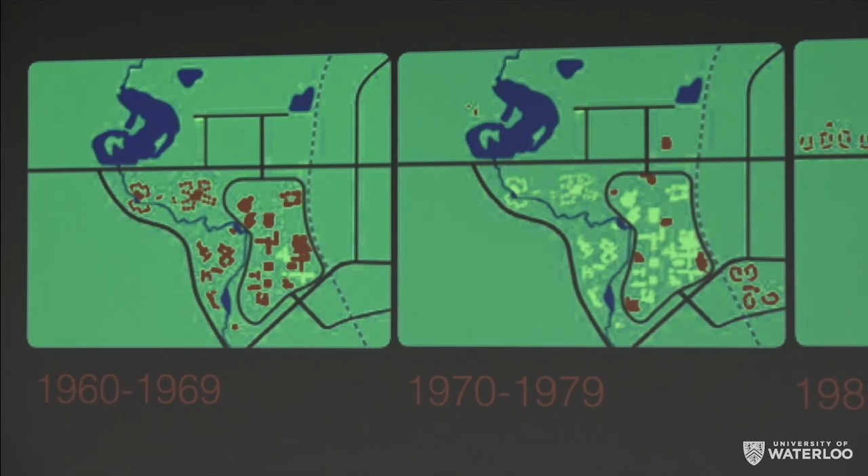80 to 89, what do you get? Fed Hall, Columbia Icefield. The building on the right wasn't built. That's the conversion of Waterloo manufacturing into dance and fine art, right, and such.

And then the two buildings that matter to me are the one at the lower left, which you may euphemistically know as ES2, and the one in the middle, huge red pattern and form in the middle, which is this building right here.

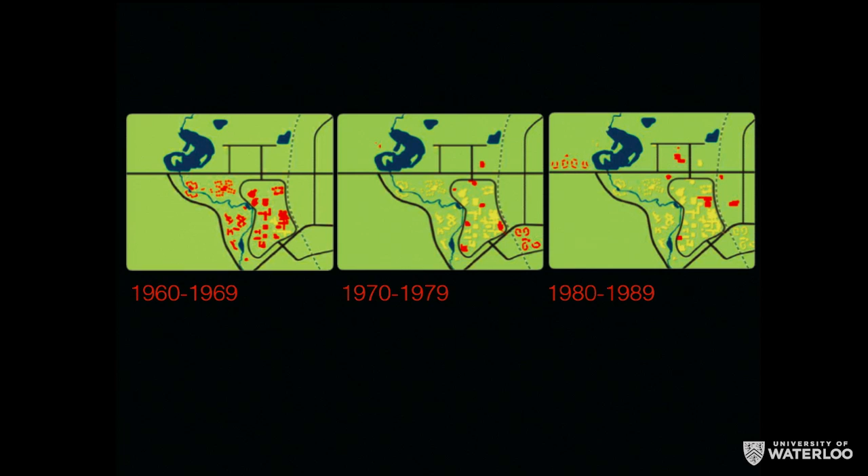It's really interesting how little was actually built in this period, and construction actually drops further, as if I gave you the map from the 90s, there's virtually nothing on it. And then around 14 years ago, things start to pick up again, ramp up in a big way.

But I just wanted to put the Davis Center in some kind of context here, because there's a huge slowdown in construction from the end of the 60s. It's slowing and slowing and slowing into the 80s and actually into the 90s. So this building is actually a sort of rare phenomenon.

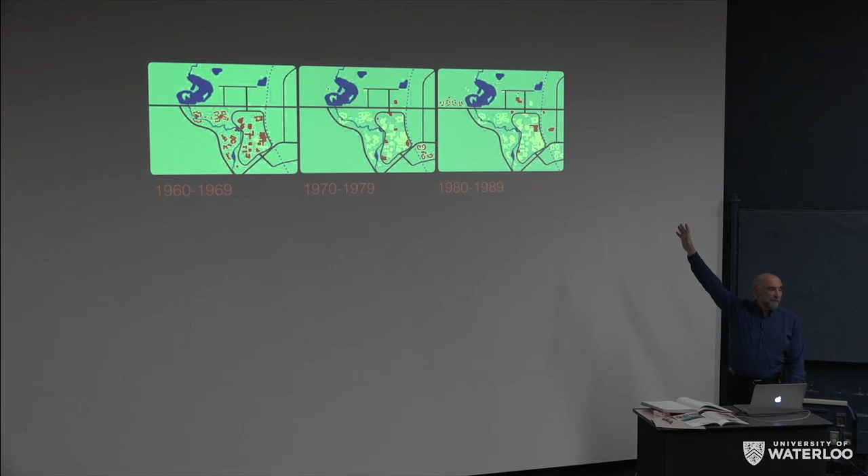For those of you who are around, the funding issues surrounding this building were quite profound. The building was supposed to cost $20 million. Actually, to think of getting this building for $20 million today is just inconceivable. We live in the shadow of the quantum nano cash cow.

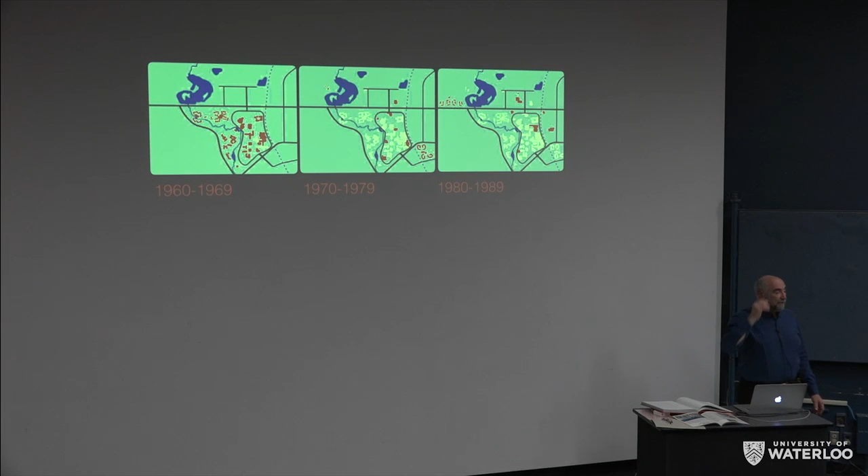But it didn't cost $20 million. The price ballooned, and of course, it meant that other construction projects had to be put on hold.

Now, I'm going to look at this from the architectural perspective, and I'll remind you that when Waterloo was first conceived, they actually hired a local firm named Jenkins and Wright to do the first building design. But quickly, and for reasons that I'm not clear on, they jettisoned Jenkins and Wright. Jenkins and Wright is best known for what was the C.N. Weber plant on Queen Street in Kitchener, a very beautiful modernist building.

And Waterloo went out and hired Shore and Moffat, a big old firm from Toronto, to do the master plan for the Waterloo campus and to design the buildings. To be dead honest, virtually everything you see in this aerial photograph from 1967 was designed by Shore and Moffat, with the exception of the under-construction Math and Computer Building, and of course the affiliated colleges on the other side of the river, which were all actually designed by local architects. But otherwise, it's all Shore and Moffat.

And when you talk to people who were working in the office at that time, they were having a riot. At first there were very linear, straightforward buildings creating these courtyards and such, but then they kind of get on the weed and design the engineering lecture hall and South Campus Hall, and you wonder what were they smoking. This is the 60s.

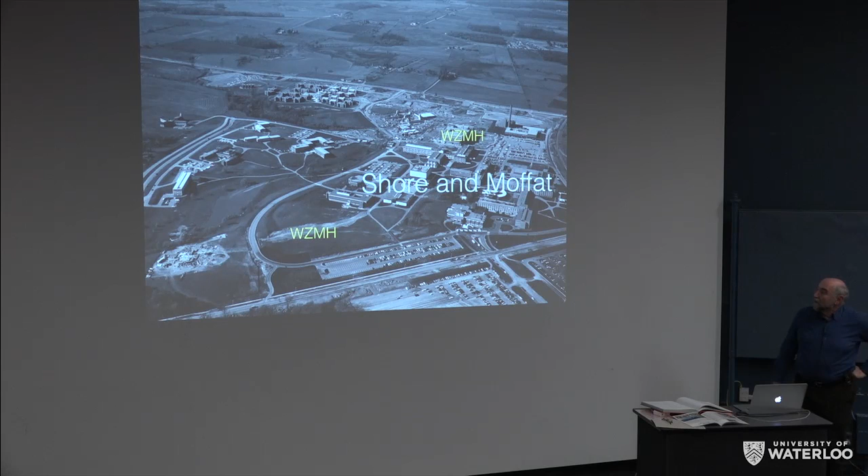And then Shore and Moffat did the athletic complex too, but the university started to hire other architects. So first off, you get a firm called Webb, Zerafa, Menkes, and Housden, which was best known for ruining the downtown cores of middle-sized cities from the east to the west coast of Canada, Halifax to Vancouver, tearing down existing building fabric and putting up crappy high-rise office towers. But we gave them the Math and Computer Building, and the two buildings in the southwest corner of the campus, the Humanities Building and PAS.

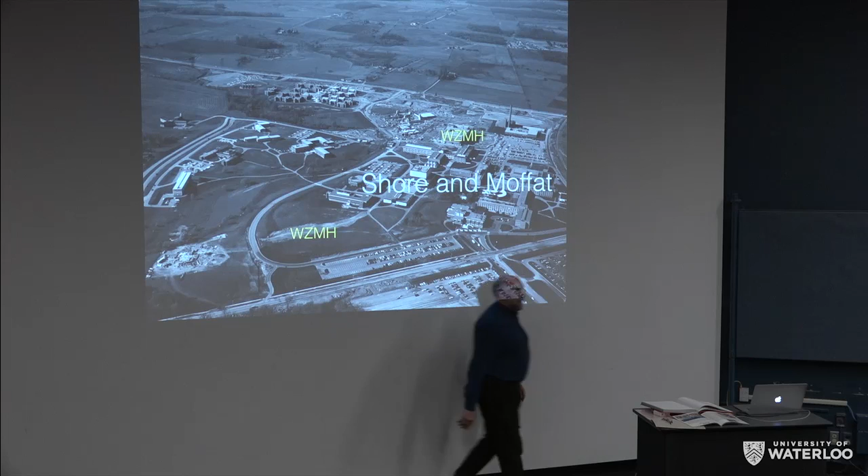And we decided to give prizes for the most bizarre staircase that you could possibly come up with. Now, in a more positive light, and I should say, being an architecture student on co-op, I have to admit that I actually spent a work term at Webb, Zerafa, Menkes, and Housden. But I didn't have anything to do with these buildings.

The very, very talented Japanese-Canadian architect Raymond Moriyama, architect of the new Region Museum, is responsible for the design of the Health Sciences Building, the original Health Sciences Building, and the Minota Hagey Residence, which are quite good buildings. The Health Science building made a very bad ecological error in trying to put a widening of a creek immediately after a 90-degree turn in the course of that creek, creating in effect an eternal mudflat. But Ray really wanted that reflecting pool in front of the building, and fine.

And then one of the weirdest decisions was Engineering 4. They hired an engineering firm to design the building, and Giffels went out and hired some architects to help them design it, and then they really tried hard to be like architects and do things that were totally irrational. Like those towers and gates at the big propylea entrance to the east end of the campus, and strange multi-story spaces inside. And then, of course, the idea that people shouldn't actually get natural light in classrooms, so they put corridors on the outside of the building, which is hugely wasteful in terms of public space, but they were doing it for why, I don't know.

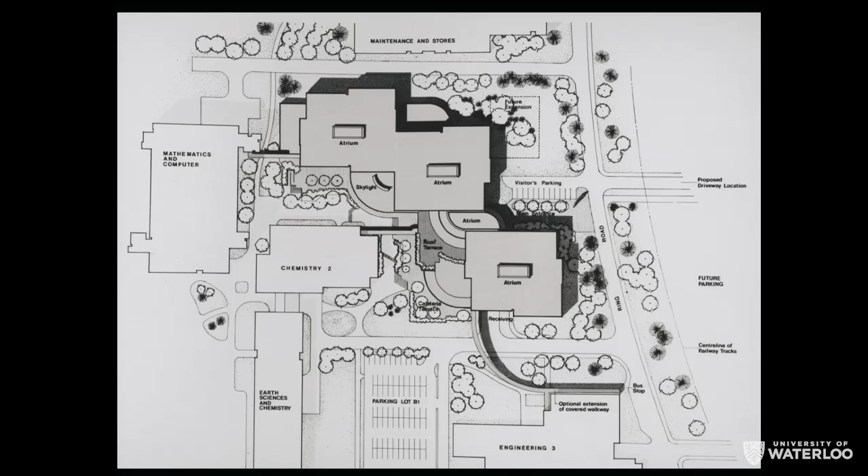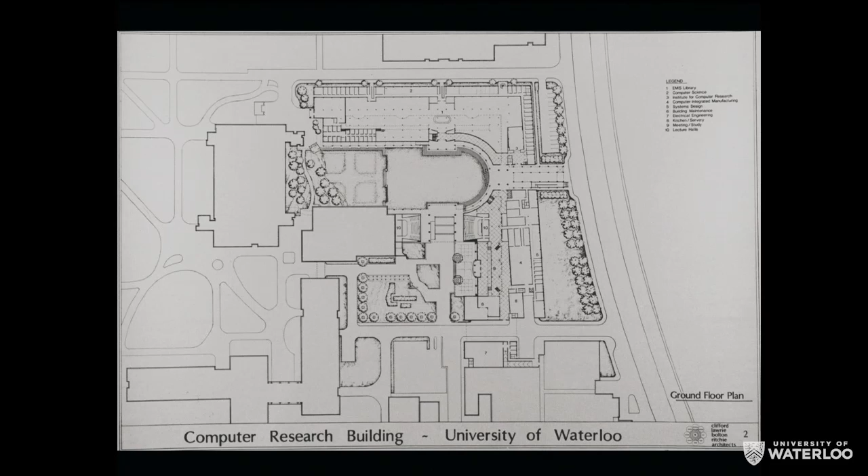This is Clifford, Laurie, Bolton, Ritchie, who are actually pretty good architects, and it's interesting what they end up doing. They create an L-shaped building, thicker on the east-west axis, thinner on the north-south, with a big courtyard with a kind of theatrical space at the east end and a huge passage facing onto the ring road. The building is actually quite close to the ring road in general. As you know, the ring road veers over, so you get wider at the south end than the north.

There's a big atrium in the center, so not unlike what you've got, but none of these sort of secondary multi-story skylit passages.

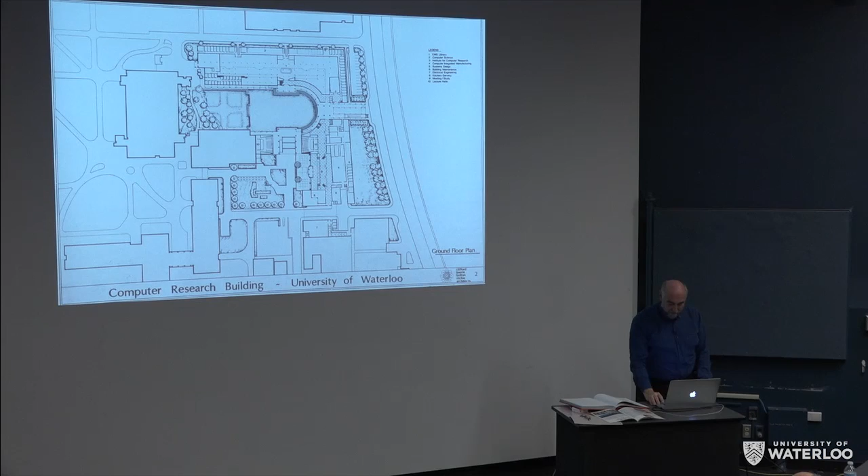Now this is really interesting. This is Nish, Owen, Roland, and Roy, Knorr architects from Toronto. And they too have this L-shaped building, this giant ziggurat, opposite the Math and Computer building. These are the 2 lecture halls, this kind of monumentalization of the lecture halls. And then they have this kind of stepped-down architecture, and what is at the bottom of those steps actually anticipates a bit the new science building over there.

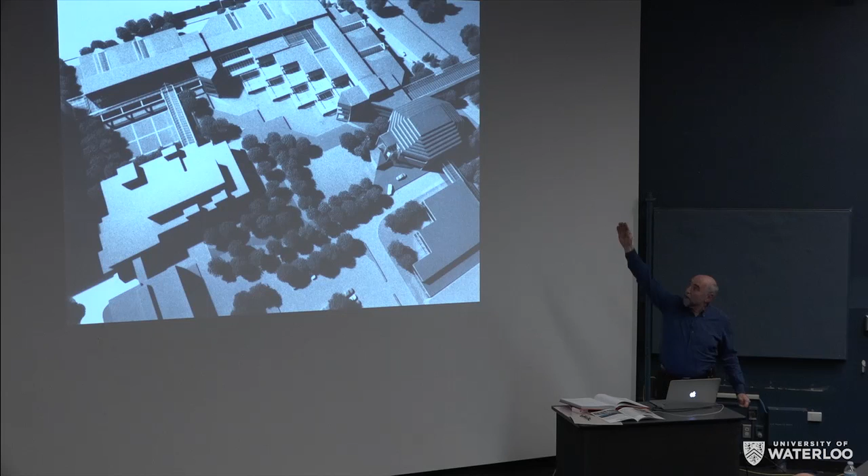But that space at the bottom is a huge pool, like a lake in the middle of the courtyard. Again, a kind of metabolist architecture with big circulation spaces going off in an L shape.

It's actually interesting, but this one is a fantastic thing. I apologize, the last one is Shore Tilbe, the successor firm of Shore and Moffat. This one is Knorr—this is Nish, Owen, Roland, and Roy. And they've taken the industrial skylight to a monumental dimension.

The entire building is covered with sawtooth skylights, and they're not small. No industrial building in Waterloo region has sawtooth skylights this big. Our building in Cambridge has sawtooth skylights, but these things are colossal.

My own estimate of the cost of this building is double what the budget was. In the end, this building cost 50% more than the budget, but that building would have been double, for sure. You can't build this thing. I don't know what they were smoking.

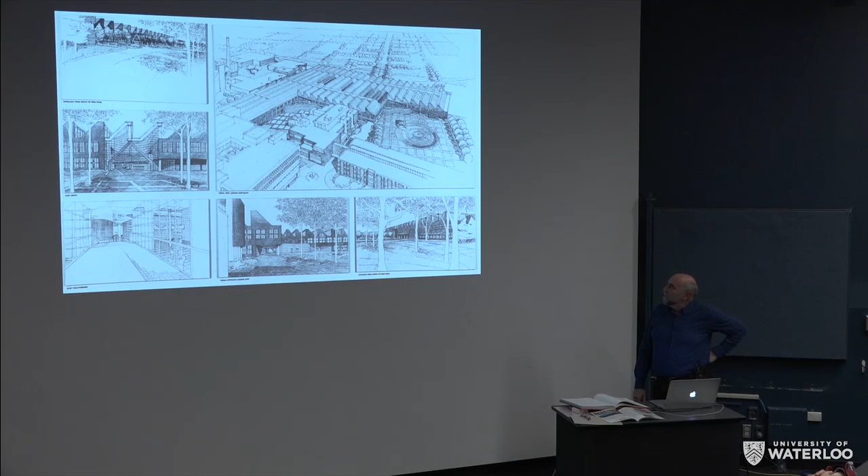And look at this kind of surreal courtyard over here. Again, it's kind of a little gazebo and then a volcano in the center for sacrificing failed students. I just don't know what to say about this thing.

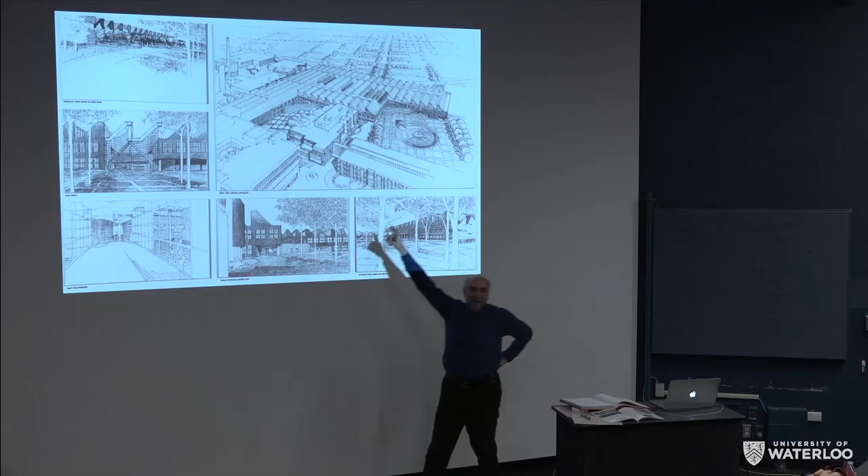And then the courtyard between the building and Math and Computer—anyone who was alive and knows anything about architecture in the 1980s knows that form, the curved form facing, we called it the piano curve. It was known as the form of the year. Almost every building wanted one.

And then this sort of strange tartan grid of what? Like, what is that in the courtyard? We don't know, but this is the image. The whole idea of this thing is so that you cannot understand what the form of the building is.

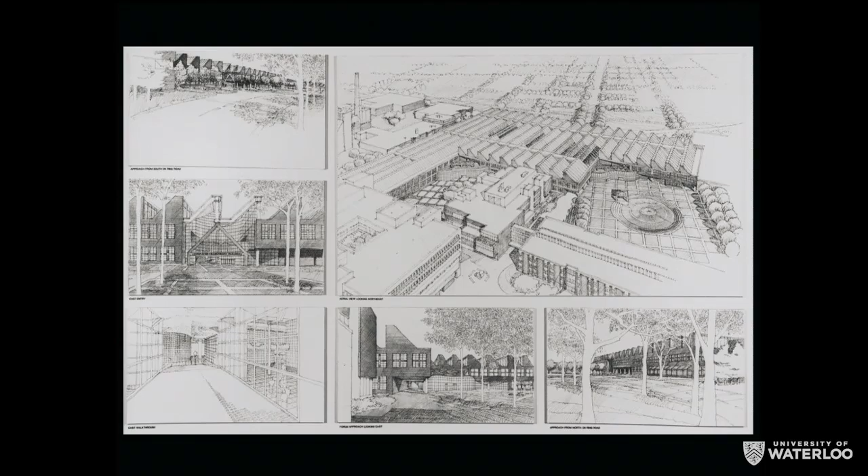I once sat in a crit with a very good architect looking at a student project that had one of these. And the architect looked at the student and said, 'How could you make your pencil do that?'

Now, the curious thing that happened in this competition was it was supposed to be a one-stage competition. They get the 6 projects, they pick one. What happened was that the committee couldn't decide. There were 2 projects that got a certain amount of favor. One was the project that eventually got built, and the other is this project by Eberhard Zeidler, the architect of the Eaton Centre in Toronto, the McMaster Health Sciences Centre at Mac.

Eb Zeidler is one of the most successful architects ever in Canada. He was my very first employer. I worked for Craig Zeidler and Strong when I was on my 1A work term. I thought he was God.

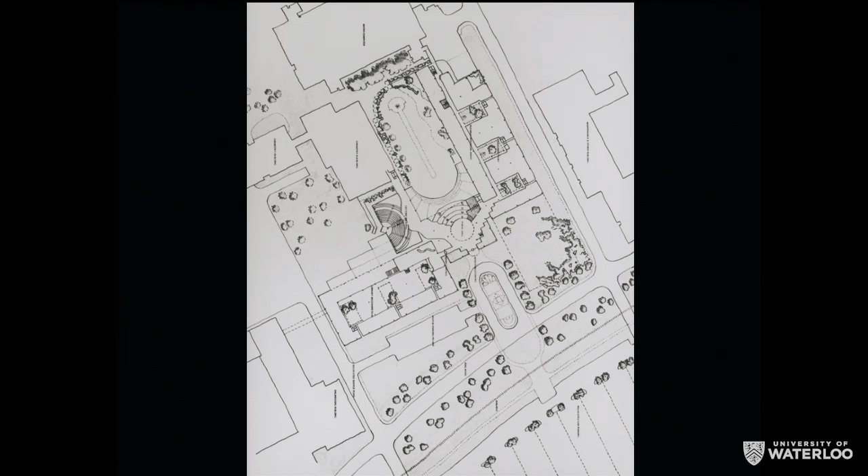This site plan is not particularly clear. We know that there's a big courtyard. And trivia: Chemistry 2 was designed by Craig Zeidler and Strong.

And the co-op student on his 1A work term was given the job of designing the super graphics, the abstract patterns that were painted on the block walls. So if any of you remember those sunburst patterns from in there that have now been painted over, I did those. That was my very first professional work.

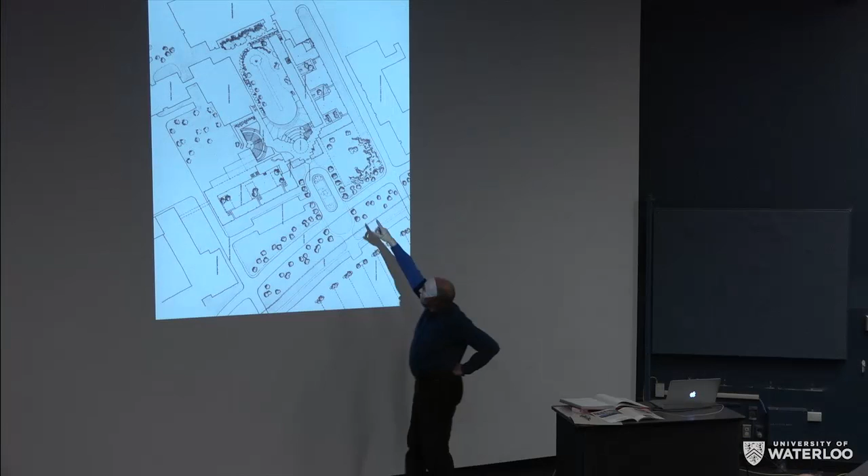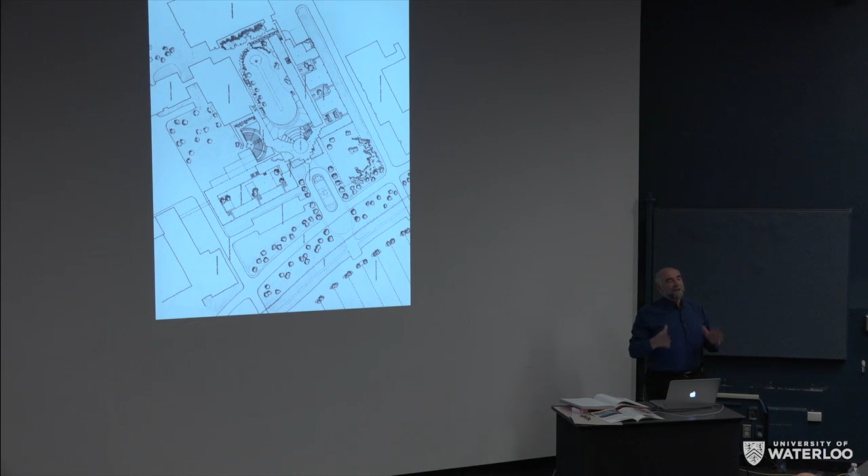So they've got this giant sort of hockey rink looking courtyard and another sort of oval thing, a turnaround, a porte cochere out in front. And then two wings of buildings, and the wings are divided into smaller buildings by courtyards. It's not a very compelling looking drawing, but it was a very interesting alternative to all the other ones, which were these kind of mega structural, continuous, extruded buildings. And Zeidler's building is a whole lot of little pavilions, really, with courtyards and trees in between them, a much more genteel and gentle kind of architecture.

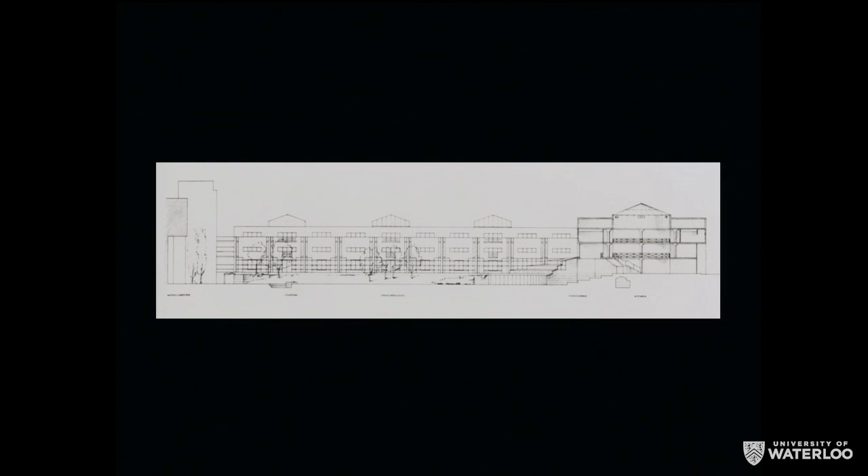It looks like a 1980s kind of postmodernist building. It had a continuous facade on the big courtyard, and then the little courtyards inside were glazed over so that they were protected. But its progenitor is actually Thomas Jefferson's University of Virginia, with a kind of walkway connecting a series of academic pavilions, and that was what this building consisted of.

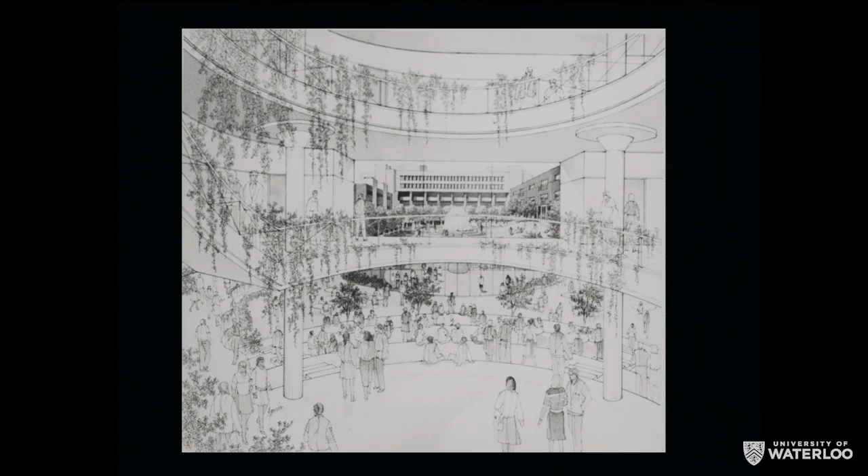So this is the most compelling drawing in the whole set, which is this sort of fairy tale vision of the central rotunda looking into this Baroque courtyard, the backdrop of which is the Math and Computer Building. It's a fantastic drawing, just a fantastic drawing.

So anyway, the jury picks these two schemes, this one and that one, and says to the architects - so the original schemes were submitted at the end of April. The judging went on for a couple of months, and then early in the summer, they tell both architects, you need to do new schemes.

We need changes in both of your schemes, and the final competition will be between just you two. Now, I get the sense from talking to Eb Zeidler that his view of this was, a deal's a deal. We did a scheme, you paid us almost nothing, we're not working anymore on this. So when the final schemes came in at the end of August, the Zeidler scheme was basically unchanged. No additional work had been done, a model had been built, and the pavilions became a bit more articulated.

I cannot find in the university archives any images of the final Zeidler scheme, and Zeidler's office couldn't find them either, so I can't show you exactly what the final scheme looked like. I'm only going by my own memory, and I followed this quite closely. They articulated the pavilions to make them appear more separate, and they made it look way more bricky - just more brown bricky, like what they thought the rest of the campus was about.

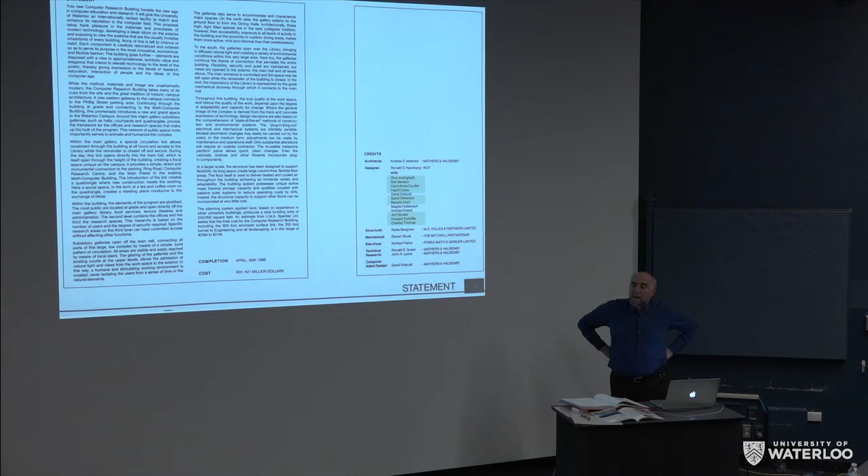But what's really interesting to me, and I've had some testimony in preparing for this today - I went and talked to some of these kids - is that it's actually sort of my fault that this happened. And the reason I say that is that Ron Keenberg was invited to come and speak at the University of Waterloo School of Architecture. And he's got a big booming voice and an even bigger booming ego, and a lot of talent.

And he influenced a lot of students and seduced a lot of students. And so he actually attracted - the green names here are students who were in the graduating class in the year that this building was designed - and he basically made off with a sixth of our graduating class to work on this competition.

If you look at the team, and he's even left out a name here, and I'm not sure why, but the ones in green were students in the architecture school. Dave Driscoll was a graduate. The only person from his office in Winnipeg was this Magda person, and Andrea Christoph was a friend of Larry Richards from Toronto. So that was the design team.

Their statement for the building, it's a Keenberg statement. I'm going to make a building that is the embodiment of an idea of architecture in which architecture is defined by its purpose and its elements. He had five elements he liked to talk about: structure, mechanical, electrical, skin, and what he called fitments. And when you walk around this building, it's perfectly clear that his elemental thinking about architecture followed right through. You can see the elements of structure, skin, electrical, mechanical, and fitments.

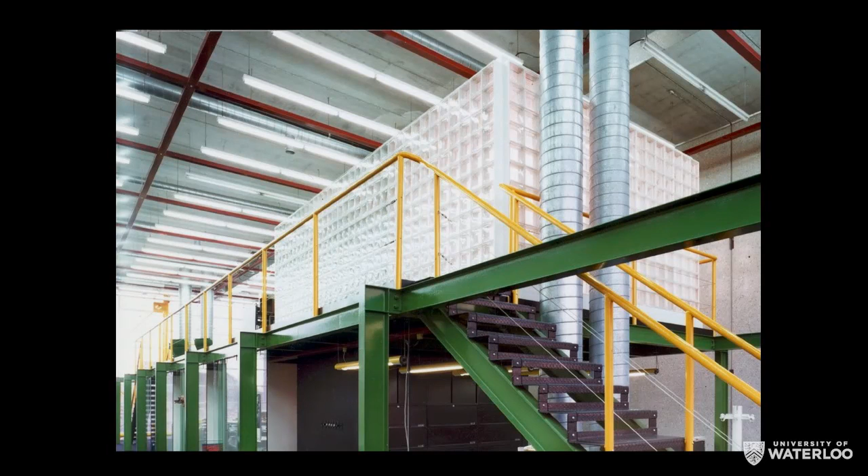This is the IKOY office in Winnipeg. And if you want to know why this building looks the way it does, just look at where they work. This is their office. Ron and his partners made a huge amount of money early in their careers designing cheap high-rise apartment buildings for developers in Winnipeg. And then they had a road to Damascus conversion. Ron fell off his horse, saw the light, and decided to use their ill-gotten gains to pursue a new vision of architecture, rooted in modern technology, in the completely literal and straightforward expression of the techniques involved with building contemporary buildings. So that's what their office looks like.

The only reason Mathers and Haldenby got involved in this project is because some of the students that had gone with Ron had done co-op work terms at Mathers and Haldenby and decided that the best way Ron could win this competition, because he couldn't practice in Ontario, would be to ally himself with a well-established firm in Ontario. So Ron, through the students, connected with M&H, which made it legal. Actually not, but at the time, they thought legal.

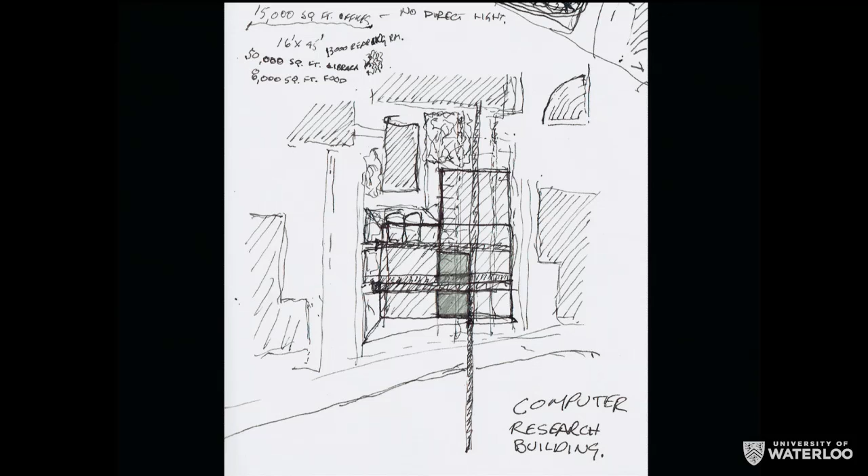Like, what was there over there in the early 1980s? Nothing. It's very interesting to see what's happened. So this is the original sketch, and there's a couple of really interesting things. I like the one at the top: 15,000 square feet of offices with no direct light.

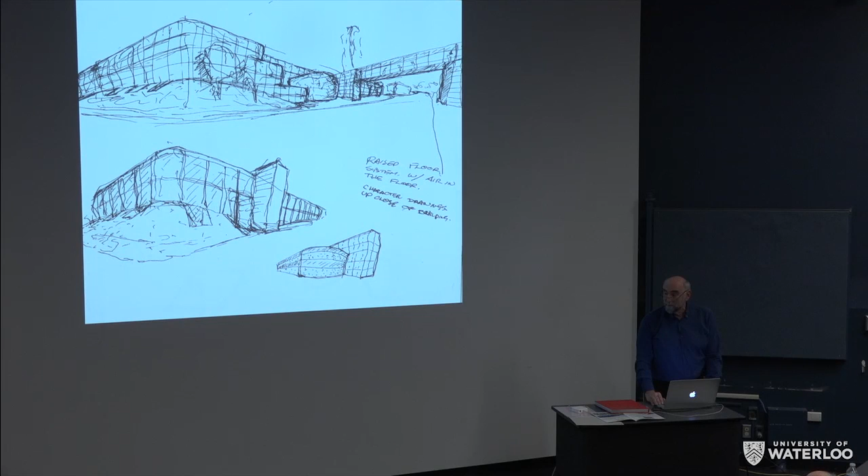So they knew that, right at the beginning, they had a crisis when you design a building that's just this big rectangular block. But the aesthetic was obviously already there - it had already been built at Manitoba, so they knew pretty much what the building was going to be. And then on the inside, the haunched columns.

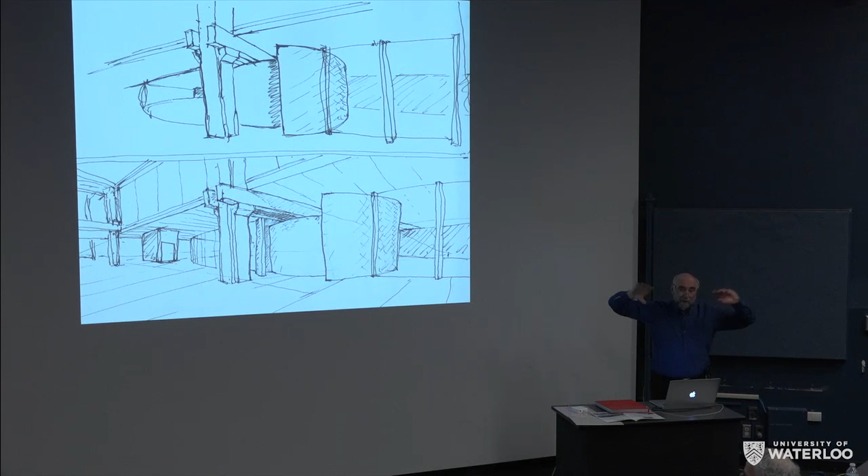Now, I don't know how many of you know this - probably most of you already do. But originally, the idea was that all of the structure in this building would be precast in a factory where you can control the quality. So the notion is you walk into this building and it looks like it's all an assemblage of parts. The problem was that the concrete industry in Ontario at the time was only precasting bridge beams and cladding for office towers. To get someone to set up to precast the columns and ribs, vault ribs, in this building was prohibitively expensive.

It would have cost a fortune. So all of those columns that look like pieces that have just been assembled like a Constructo set, with the haunches so you can just lay the beams on it - complete lie. Every one of those columns was formed and cast in place. Every one of them, right? So the image of the building, Ron and his whole thing about truth in construction, blah blah blah - lie.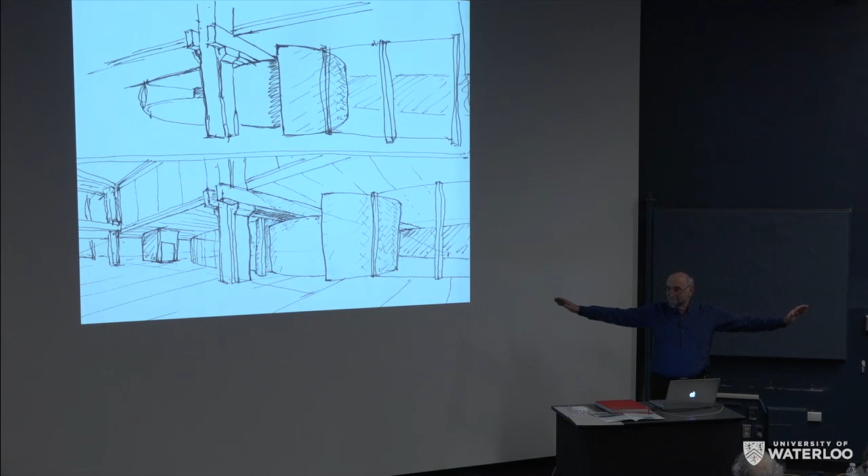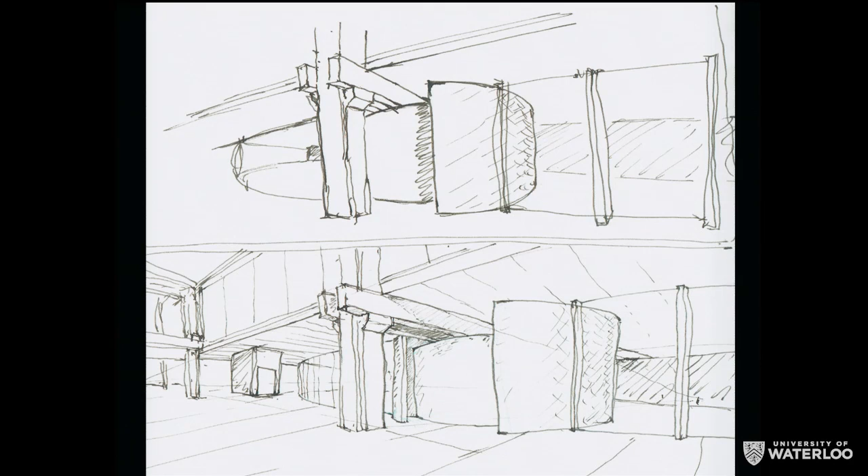Didn't happen. It looks like it did, but if you look at them, you can see they've cast them, and the joints are not where they should be. The joints are halfway up the shaft. It's actually hilarious. But here they are, the first sketches - curved walls, iconic spaces in the center, they knew what they were doing, and then the haunched columns, which were all supposed to be the joints, right?

No. So here's the plan. This is, I'm sorry, a beautiful watercolor, but the material in the university archives is all black and white, from microfilm. It's very hard to get at. But this is a Howard Sutcliffe watercolor, and you can see what the original plan was.

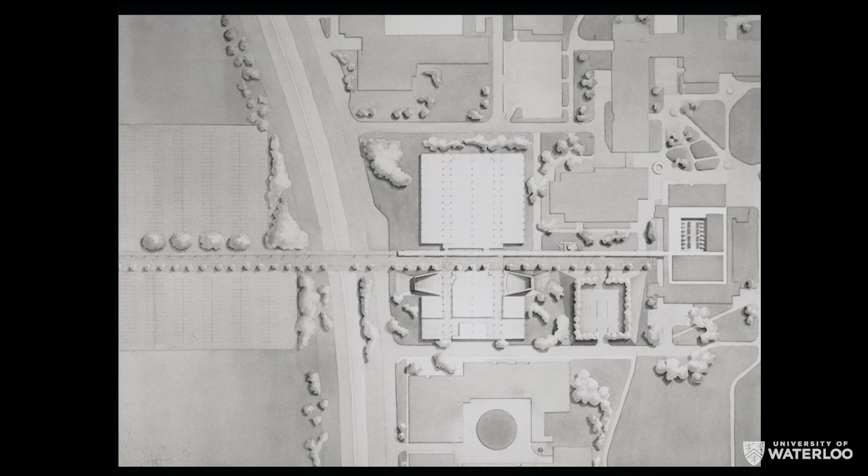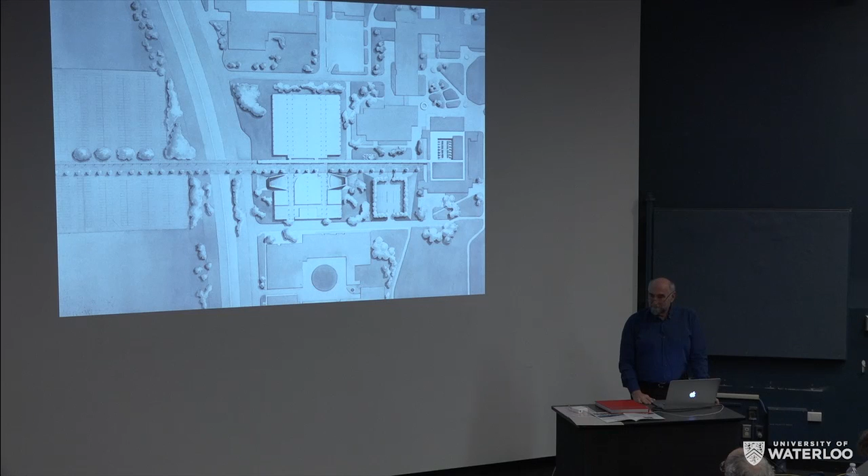The EMS library is on the top of the drawing here. North is down in this case. This was going to be the dining hall, the two big lecture rooms, and then the center element, which is basically the same, and no long wing, no northern wing. There is a parking lot here, then some kind of courtyard, and this boulevard that goes off to infinity. I don't know where they thought that was going to end.

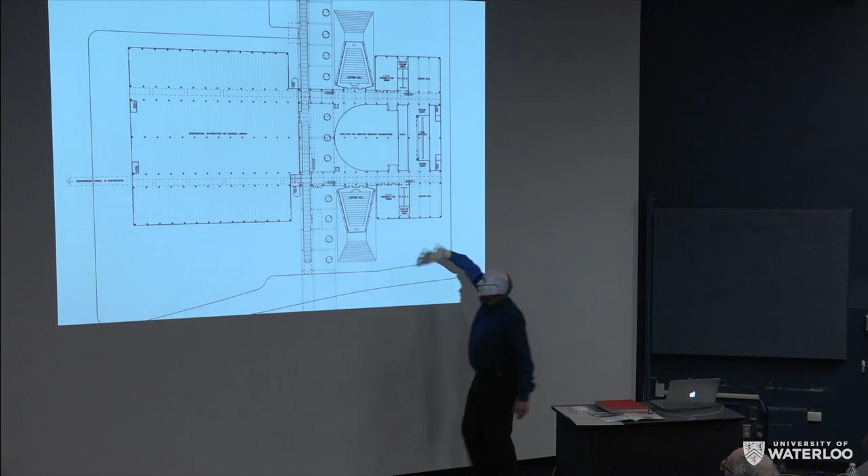I mean, Phillip Street, I guess. I don't know. But they had this premonition about the east part of the campus. So here it is - this was the Keenberg, Mathers, and Haldenby submission. You can see dining hall, ICR in the center, and the library flanked with the lecture rooms, and a big atrium and two vaulted corridors that go up through a couple of levels.

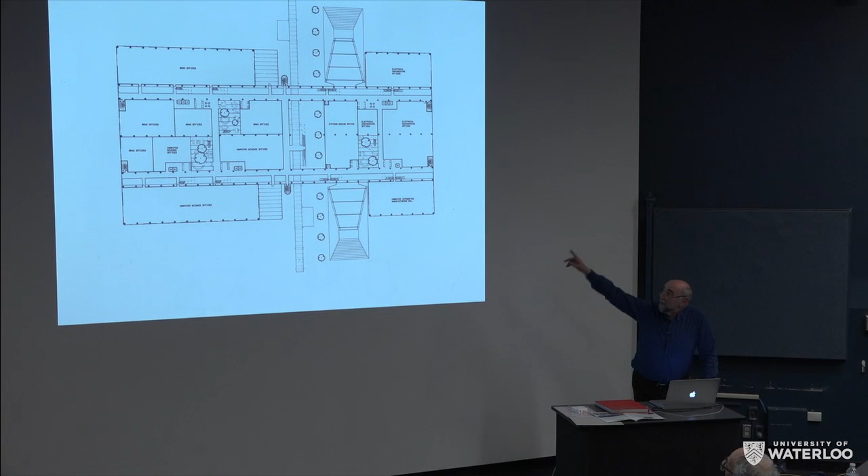What I really like about this is, of course, it shows how many of the offices wouldn't have had light in this scheme - more than half the offices wouldn't have had light. Now, in studying the other schemes, the only scheme where every office had light was the Zeidler scheme, because they put all those courtyards in.

So if I reconstruct the thinking of the jury, I have to think they're looking at the Keenberg scheme and they like the compactness of it and they like the spirit of it, but then they look at these massive areas where the offices don't have windows, and then they look at a much more traditional and gentle scheme by Zeidler and say, well, they couldn't decide. So they send them both back to work.

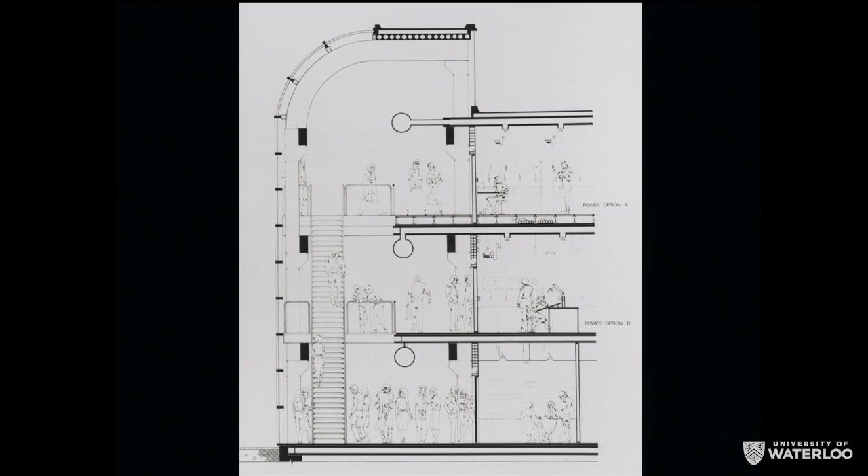But these are all part of the original competition submission, and the section is the section. You live in this building, you know it. And this is the atrium. The only real difference in the atrium is that the atrium in this project is, in a way, livelier than the actual atrium because of the location of a big stair in the main space.

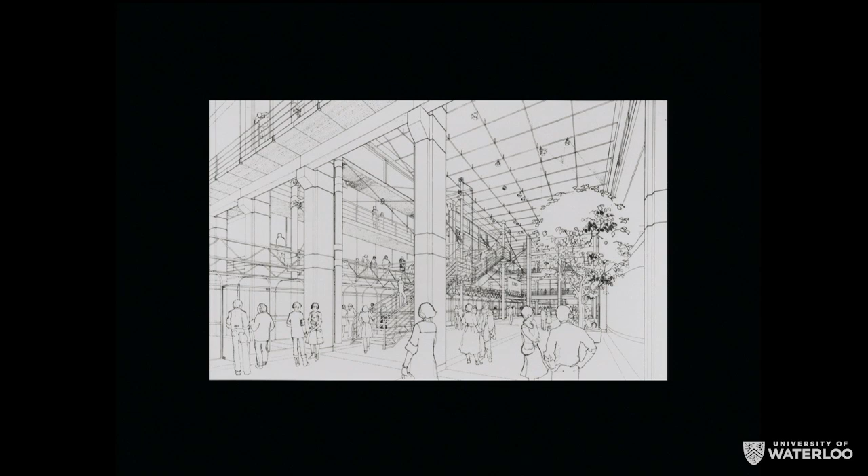Coming from the School of Architecture, we have a big stair in our main atrium, and it's a huge animator of the space. But that disappears. And then here is the view of it from the ring road, and that elevation really didn't change at all between the first and the second scheme.

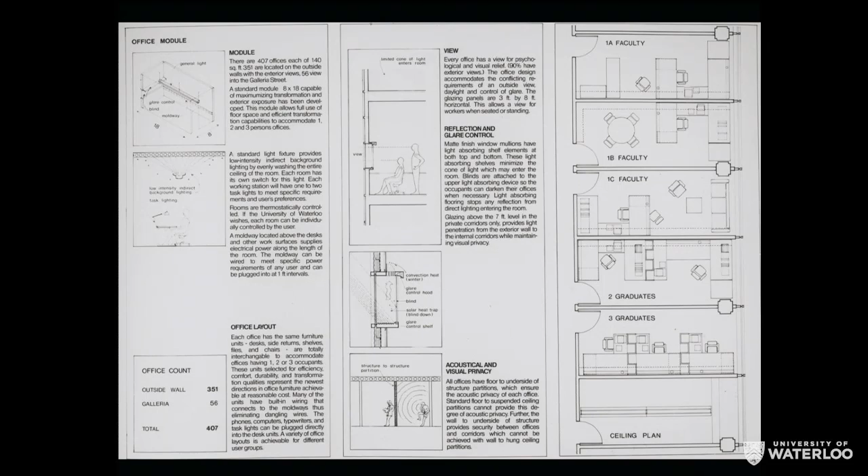For those of you hugely interested in the office design - Ron was really preoccupied with the fitments and designing the offices properly. It frustrated him immensely that people didn't appreciate all the work he was doing, and their only concern seemed to be that they had natural light in a window. It drove him crazy because he didn't really care about those kinds of things. He put huge amounts of effort into developing the prototypes for the offices.

Two problems. One, the budget got tight - I mean, not got tight, they went way over budget. So the money - and you know what happens in a construction project, those pieces that come last get cut. So what always gets cut? Furnishings and landscaping. What got cut in this building? Furnishings and landscaping, absolutely. I'll show you what the plan for this courtyard was - not the wasteland that's been out there for 30 years. And the offices were supposed to be really well equipped, really well dimensioned, very ergonomically designed.

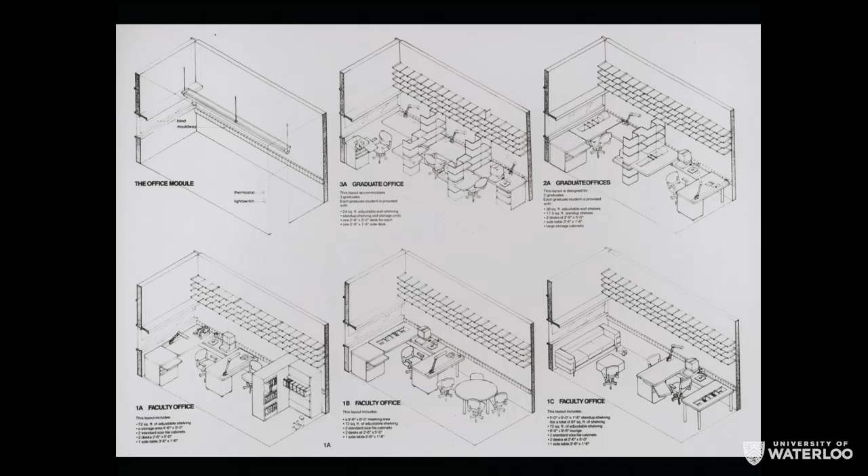Of course, in the last instance, they wanted to squeeze in more offices, so even the project at the second stage, which took a lot of the offices out of the center of the main block and put them on the long wing so more of them would get light, still they wanted more offices with windows. That's why, in many cases, the offices don't line up with the mullions in the glass - they changed the dimensions of the offices and made them narrower after they'd ordered the windows. The window mullions were ordered and couldn't be changed. The office partitions were changed, and that's just why it happened. If you think this is the only building in the world where that has happened, you would be dead wrong, because it happens all the time, unfortunately.

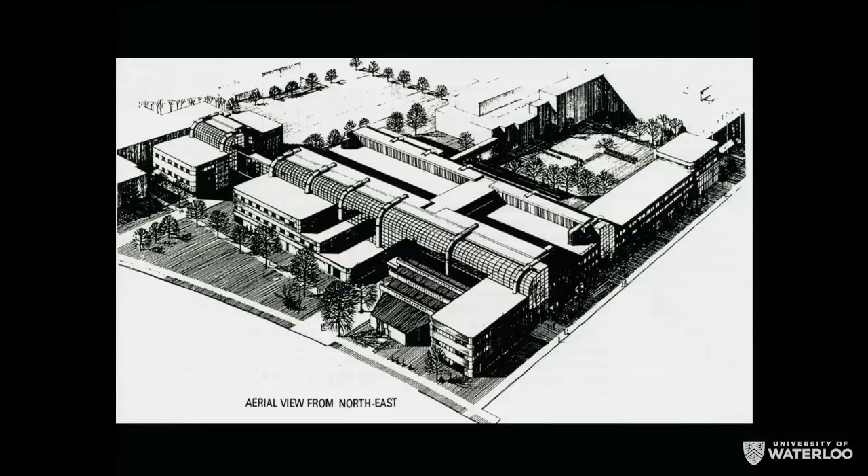Here's the final, second stage proposal, where you can see they put the dining hall at the end of the north wing. They thinned out this side of the building. And the space where we are now is obviously changed from the plan that won the competition.

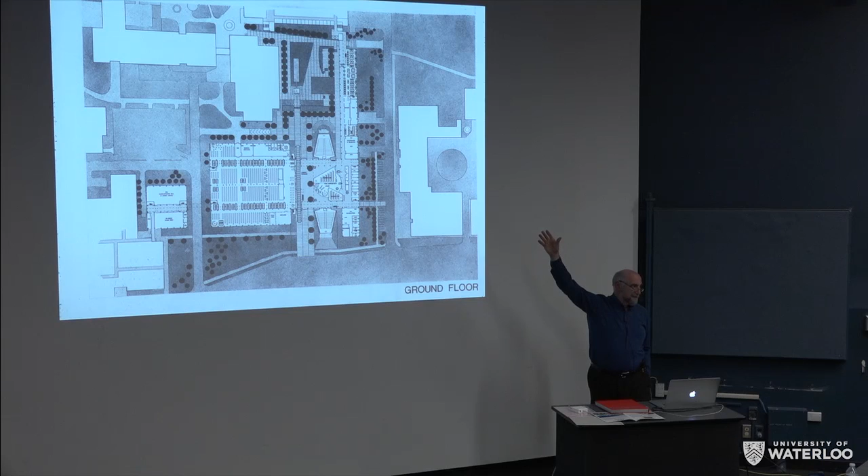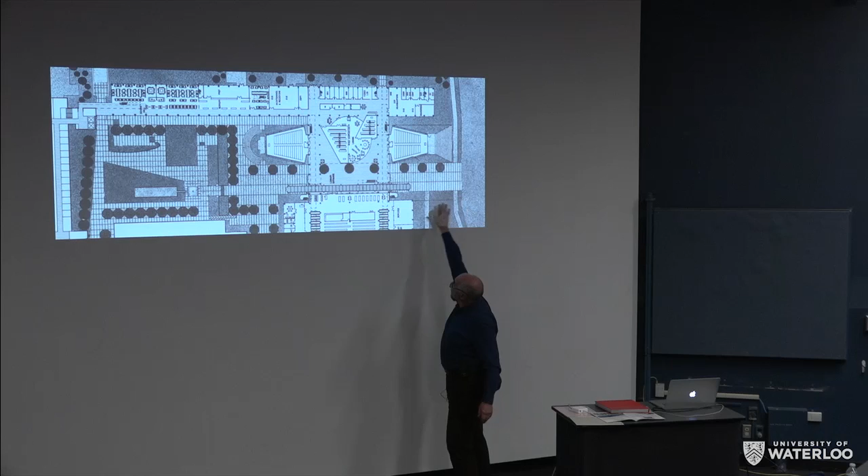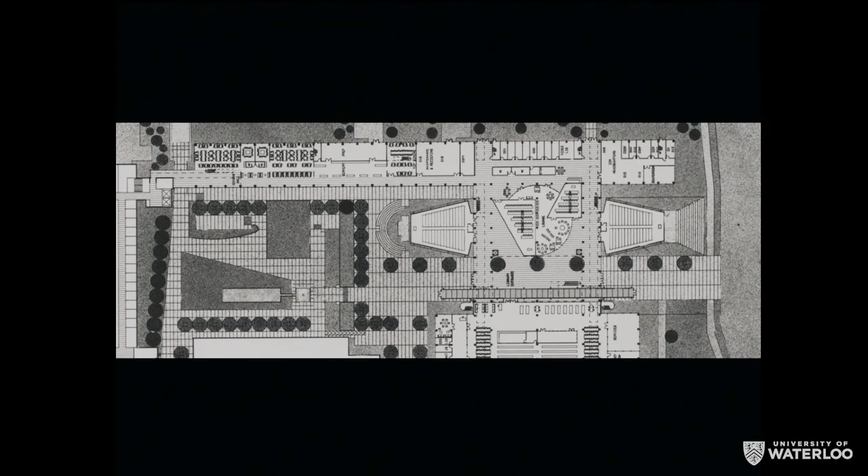Just to look at the details, you've got the terrace in the front, the passage through the building, and then this courtyard, which had pavement, trees, grass areas, and fountains. It was supposed to be a deliberate piece of landscape, but we typically on this campus, and in many projects, haven't spent any money on landscaping. It's gone by the time you get to landscaping, and there's no money left.

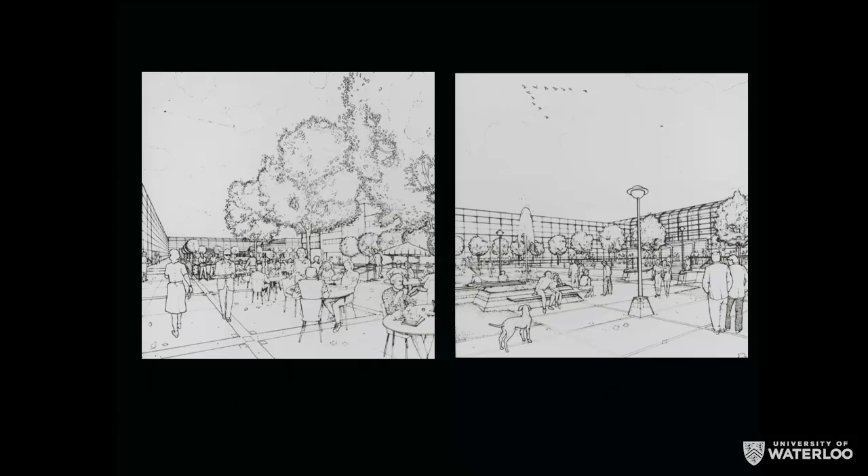These are just so you know how they won the competition. This is the courtyard. Looks nice.

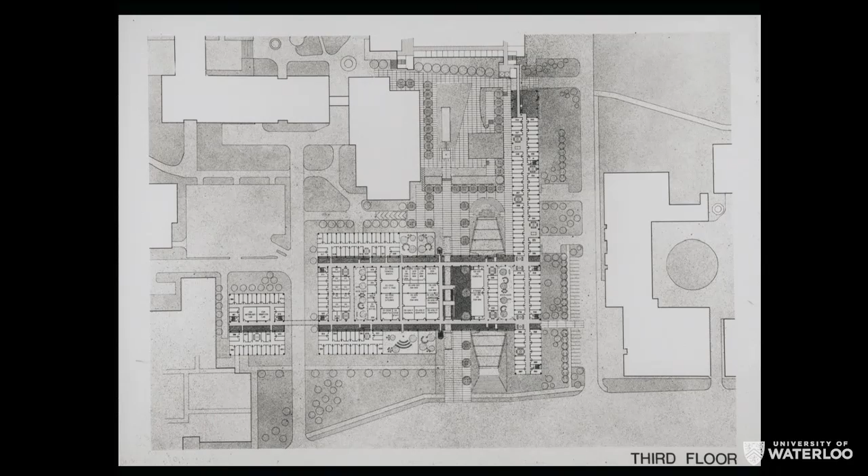So these are the second floors, this is the upper floor. You can see he just rips at least a third of the offices out of the cores of this part of the building and stretches them out along the north side so everybody gets windows.

This is the local press. First, the building was late. Second, it cost too much. Expensive building. I mean, you look at this today and say, what, $27 million? What does $27 million build you? But yeah, the budget was supposed to be $21 million. They overspent by $6 million. They had to delay the Columbia Lake Townhouse project, if you remember that, set back a year because of the overspending in this building. And that's the way it goes.

But when it was opened, the architectural press loved it. They just went wild about it. This is Adele Freedman, the then architecture writer in the Globe and Mail: bold, brash, and brilliant, and believe it or not, it's a building.

Really, this is criticism: while Toronto hasn't had much to cheer about in the way of architecture lately, the city of Waterloo can celebrate a winner. It's the William G. Davis Computer Research Center on the University of Waterloo, which opens officially next Thursday. The $27 million graduate facility was designed by IKOY, Winnipeg firm with Mathers & Haldenby. Not only does it rank as one of the most exciting buildings to appear on the parched Canadian landscape in years, but it also represents a personal triumph for IKOY's resident philosopher and chief designer, Ron Keenberg.

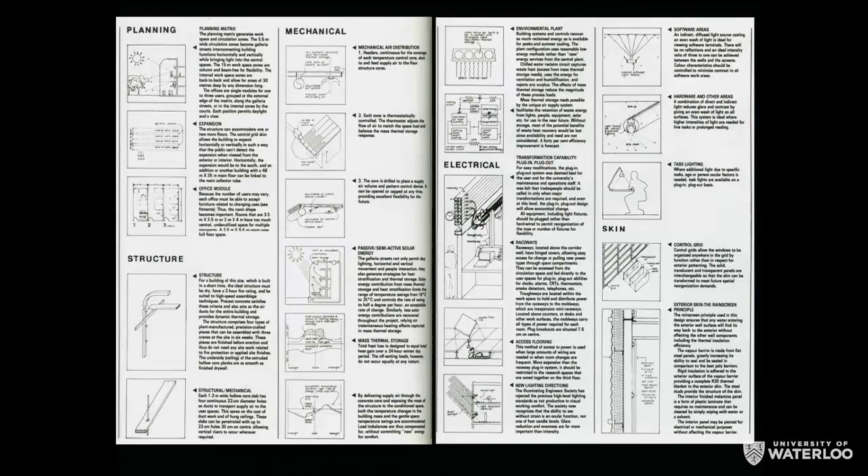And the reason, I think, is because he started hanging out with these Waterloo students who said, you can't design a building as if there's no buildings around it. You can't design a building that has no respect for the location and no consideration of its context. Ron referred to what they were saying as that 'context shit.'

But then he actually responds to it. These are the pictures that Canadian Architect published. They're fetching, and as was remarked coming in, visitors to this building generally like it. The people who don't like it are the people who have to work in it. But I got to tell you, that's not uncommon.

We also have to say, I didn't put up Kish Han's article that asserts the building has sick building syndrome. Actually, when I read it, I thought, well Kish, if you came over to ES2 you'd find exactly the same problems. The way plant ops handles the humidity in the air, mechanical systems are very hard to deal with. But this, and Ron's preoccupation with the directness of things and experience, did lead him to some absurdities.

Walking in through a single door from a Canadian winter into this atrium is an absurdity. Having no shelter over the entrances was an absurdity. I mean, there's directness and there's just abuse. He just didn't like these kinds of things.

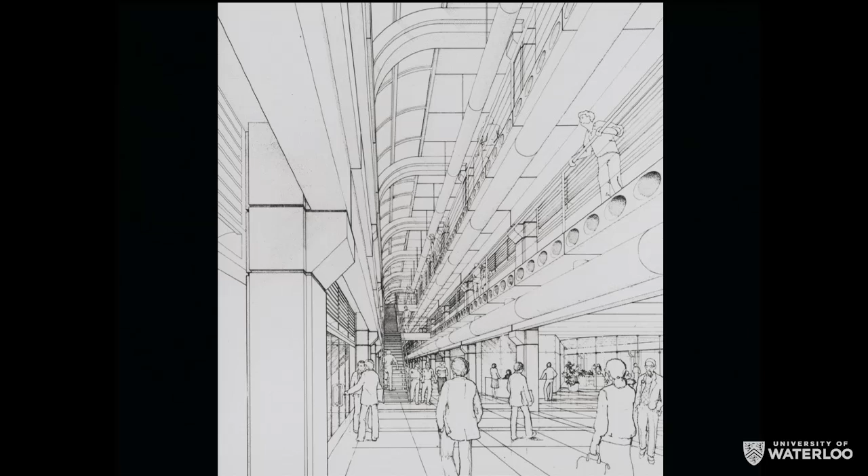Architecture based on clever manipulation of building elements by IKOY could, as in the historic degeneration of modernist work, become its own self-referential cliche. When you get buildings done this way, if they're drawn right, they look like what they look like when you build them. All these drawings were done by kids who just graduated from the University of Waterloo School of Architecture, and they drew like angels. Now we have computers, thank you.

Well, these are the ends—his sixth category was fitments. And Ron was a kind of a perverse soul, and so he took great delight in jokes, architectural jokes.

So he foisted on all of you these soda fountain stools because he didn't want furniture that you could move. He wanted it to be fixed, to look like an industrial product, and to feel like an industrial product—like you, as a person, were an extension of the product. The chair accommodates; the stool you sit on and try to balance. Ron saw people that way. He wanted people to be organized in that geometrical pattern, sitting on the stools, and he knew what he was doing. He absolutely knew what he was doing.

The next thing, of course, is the fake marble cladding on the front of this area. He told me, this is a big joke. You know, it's a university—they'd really love marble and stone and brick, and I'm just going to give them Formica. I'm going to give them a kitchen counter. And if they want marble, you got marble. That's all it is.

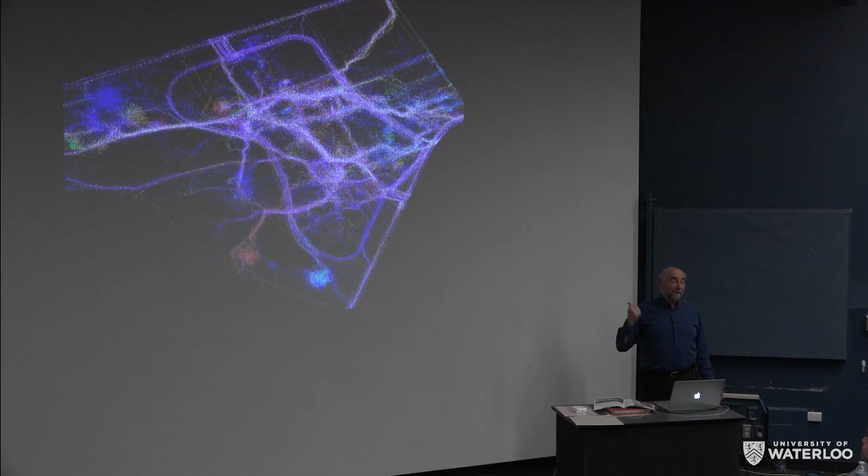The next thing that's going to happen, of course, is across the street, they're opening the only LRT stop on campus that anyone will get off at, because the one on the North Campus is in a cornfield. Who's going to get off there? They're all going to get off right here.

Now, we have been told that the buses are no longer going to go around the ring road. They're going to go onto a driveway in the parking lot on the East Campus. So all the people getting off the buses, all the people getting off the LRT, they're all going to come right through this building. This is the center of the campus.

And the east side of the ring road is the new principal axis, because all the buildings are going up. There are almost no more spaces to shoehorn in buildings inside the ring road. We still don't have a plan for the ring road. We don't actually have a plan for any of it. But we're doing it. So when I came to give this talk today, I thought, unbelievable, it really is extraordinary.

That boulevard thing that was in the Keenberg scheme right from the beginning is a vision, and it's right, because that's where people come from. They don't come in the north and south entrance, they come in the east side, right through this building, or either just north or just south of it. It would be a great thing to reconsider before it's too late what this axis of the east side of the ring road looks like, and what the transverse axis that goes through this building is.

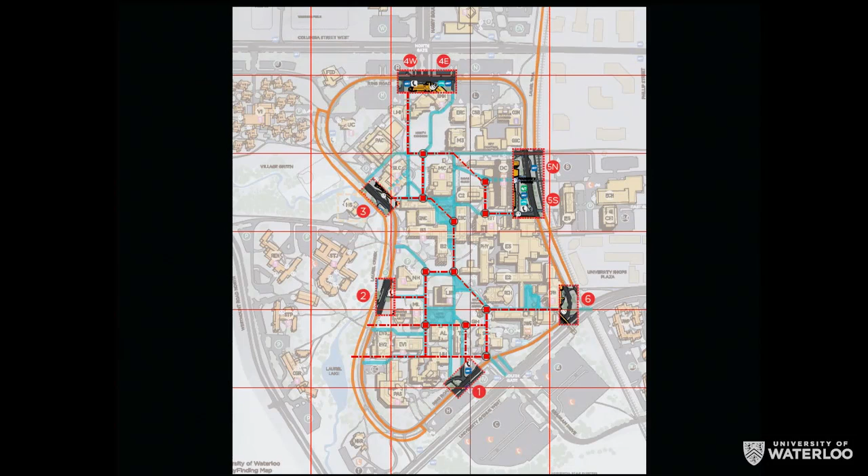But that's not what we're going to do.

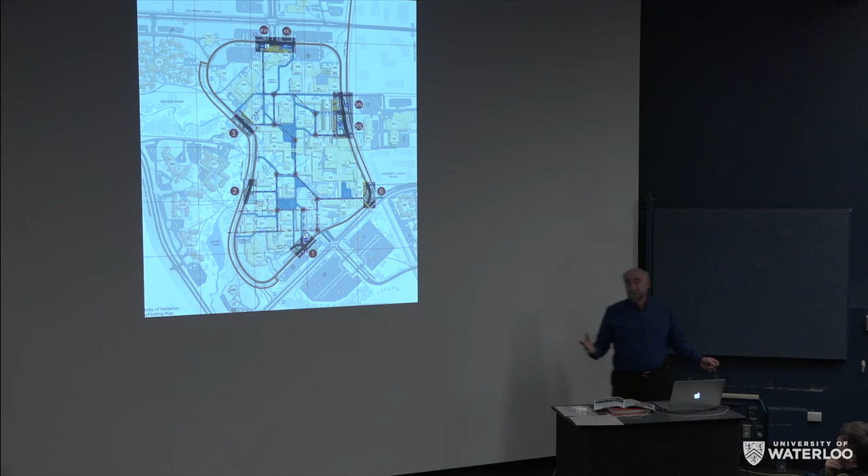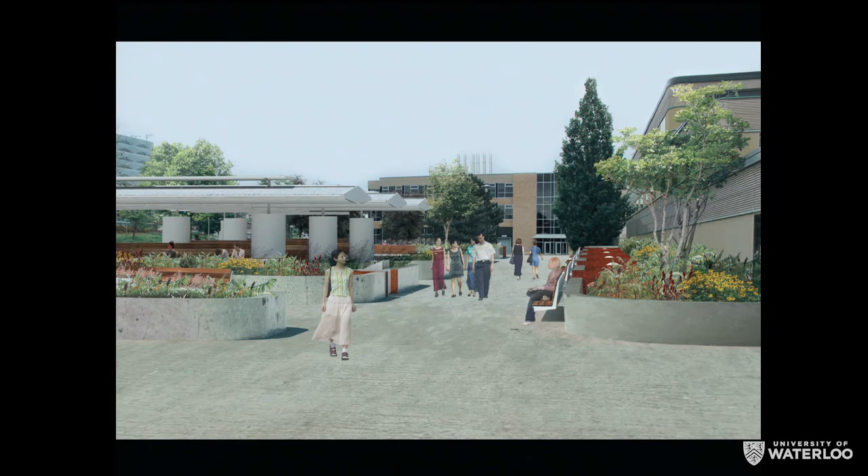I mean, this was an image of a kind of canopied garden transit space on the east face of this building, across from the LRT stop where the GO buses would come. And you've seen what this place looks like at certain times of day and night today, since they put the transit pass in. I had a son who was a student in computing science, and he would call some nights and say, well, I can't get a bus, the bus is full, I've got to wait for another bus.

This building is really designed to accommodate and welcome its role as a sort of threshold to the campus. It was that way, and if you read that original text that Keenberg wrote from the original competition, he talks about it as the gateway, the east gateway to the campus. That's why it is the way it is. It's just not going to happen exactly that way.

So I apologize for having been long-winded. I hope it's been at least a little amusing and maybe informative in some way. I'm not doing a technical analysis of the building, I'm not going to tell you how to solve its building science problems or how the air could be better. Those are mysteries left to mechanical engineers, except that apparently nobody in mechanical engineering studies heating, ventilating, and air conditioning anymore. So it's no wonder it never works. Thank you for your patience. Thank you.

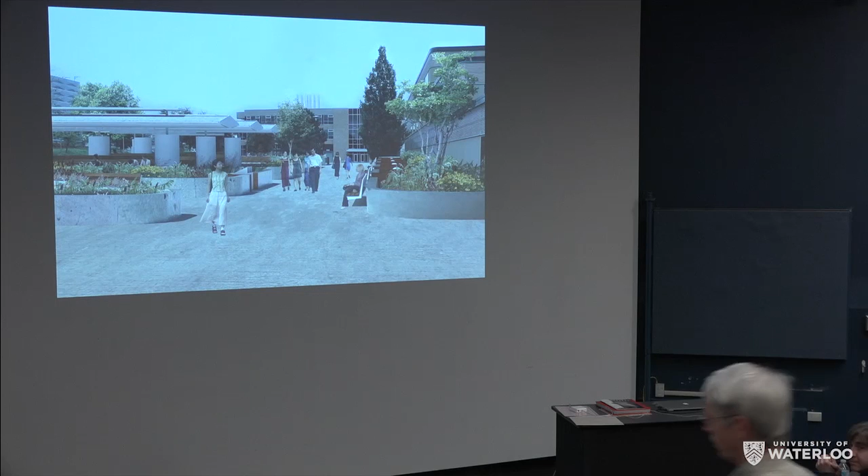I remember Ron Keenberg pulling out his little German lead holder and drawing something and saying, this building I'm creating will, when you leave your office, you'll run into everyone else that you need to see. Could you comment on how you think that's worked out? You've kind of said the residents suffer.

I mean, you can see that the ambition of the building was that he poured a huge amount of attention into the public spaces, that is the main atrium, and then the glazed galleria along the east and west side of the building. And then by adding the big north wing, he creates this kind of monstrous corridor building that gave lots more offices light, but then only the dining hall actually has a kind of major assembly space.

The problem in these cases is that the aspiration is to see atria and galleria as communal space, space where people can gather and meet and encounter each other. And I have to say that at some dimension it works, because usually when I walk through this building, I run into someone I know. Just walking through the atrium, I almost always run into someone I know. And on the upper floors, they're big, open, light spaces. They're supposed to work that way.

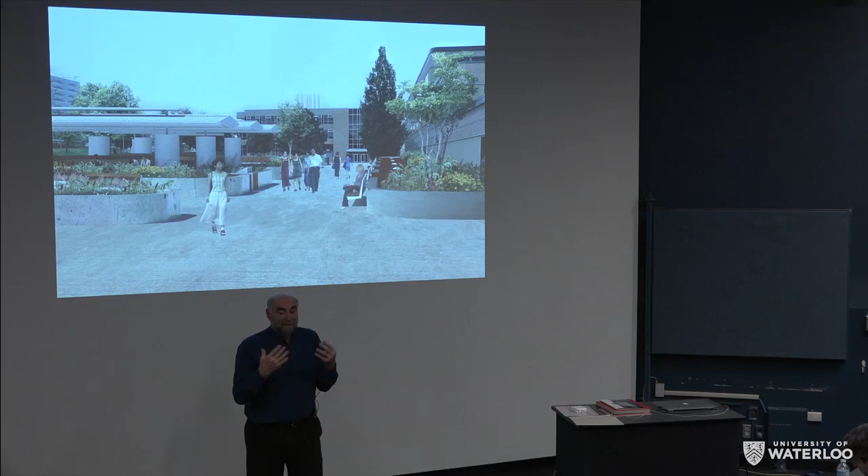We did, because architecture students drink a lot and explore places, and maybe use other intoxicants to get them there. But anyway, it's a very good point.

What they wanted to do was find a new expression of public space and collectivity at the University of Waterloo. There are all kinds of problems with this building, but on the other hand, they got some things right—they understood that the future of this campus was not the North Campus, but the East Campus. They knew that 20, 30 years before anyone else really understood it. You've got to hand that to them at least.

How would you feel about changing the actual building in any form? That particular elevation—there was a proposal 5 years ago, nothing's come of it, to extend about 75 feet towards the ring road, an addition onto the library, to provide additional study and meeting space.

Do you think that building should be left untouched? No. Even Ron—Ron has a huge ego, bless his heart—but I think he would want it to be understood that this is an assembly. It's not a complete and finite sort of Beaux-Arts plan that can't be tinkered with.